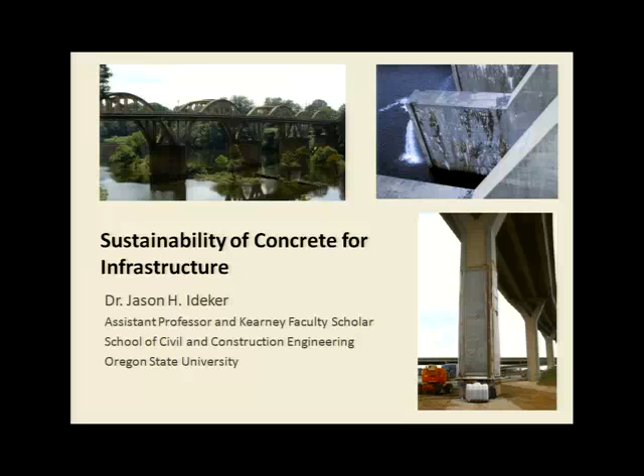I'm going to be talking a lot about concrete. My background is that I'm a concrete materials expert, both early age properties, so any concerns with early age cracking risk and early age volume change, all the way to long-term performance and long-term durability. So you'll see a lot of those themes kind of coming out through the talk today.

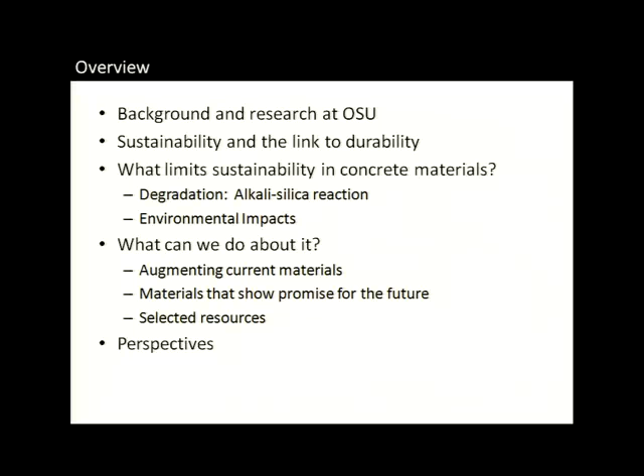Just kind of an overview, I'll give you a little bit of background about the research that we have going on at Oregon State, tell you a little bit about the classes that I teach. Some of you may be interested in some of those, and we can talk about ways that we can maybe make some of that happen. We'll also talk specifically about sustainability and what the link to durability is when we're talking about concrete for transportation infrastructure. And we'll talk a lot about some of the main degradation mechanisms that can limit concrete durability and concrete sustainability, all in the context of transportation infrastructure. Probably most importantly, we'll talk about what we can do about it. And I'll wrap up with some perspectives at the end.

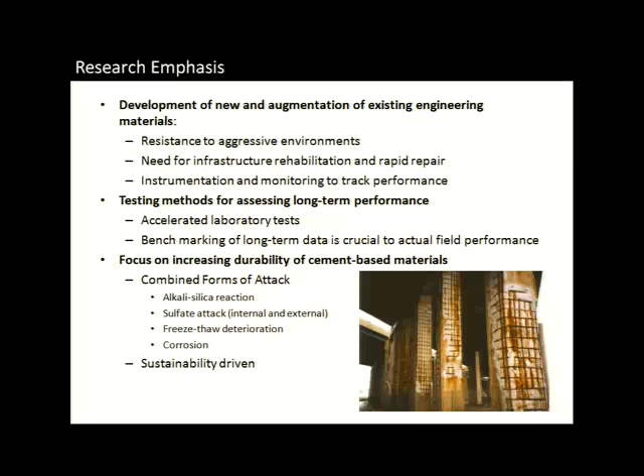So I'm not going to give you a whole lot of details here, but basically the research emphasis that we have for our research group at Oregon State is developing and augmenting new and existing materials for engineering applications. We have a pretty big focus on test methods so that we make sure that the accelerated laboratory tests that we do really capture the field performance of structures in the long term. And that ties in a lot with the focus on long-term durability of cement-based materials. One of the main reactions and main areas that we study is alkali-silica reaction, so I'll be talking a good bit about that today because it really affects a lot of our transportation infrastructure and civil engineering infrastructure in general.

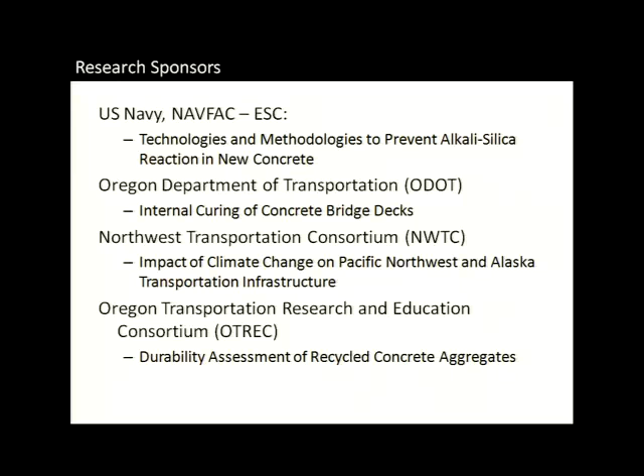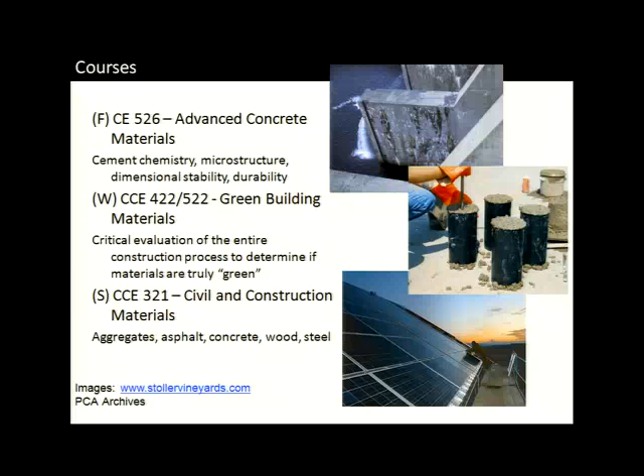I teach 3 courses at Oregon State. I put them in order now. So fall term, I teach an advanced concrete materials class to graduate students, but it's also open to upper level undergraduate students. The main two things we focus on there are development of concrete microstructure and durability, and really making the link between microstructural development and what the long-term performance of the concrete is. I also teach a fairly new class - I've taught it once. A student in here, Christy, already had that class when she was an undergraduate at Oregon State, but it's focusing on green building materials, taught at the undergrad and graduate level. And then in the spring, I teach our junior level civil and construction engineering materials class. About 90 students in that class, and it's a lab section course also. So we cover everything from aggregates to asphalt, concrete, wood, and steel.

So when we start to talk about sustainability and the link to durability, somewhat I think the two terms are a little bit interchangeable, but we can't really be building and developing sustainable structures if we're not taking into effect what the long-term performance is going to be and what the ultimate durability is going to be. A lot of that really comes down to ensuring long-term performance of the concrete. Doing life cycle analysis is something that's very important, and taking a systems approach. A lot of times it's not just one particular mechanism that can limit the long-term performance of our transportation infrastructure, but it's a lot of different factors coming together to potentially limit what the long-term performance is going to be.

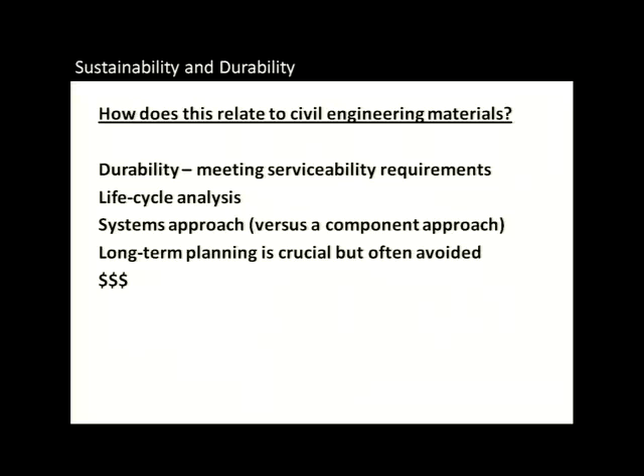Our overall infrastructure grade stayed at a D. I think the interesting part here is that it's estimated a $2.2 trillion investment over a 5-year period would be needed to bring the infrastructure up to a level that's just satisfactory, just to a level that meets the demands we currently have.

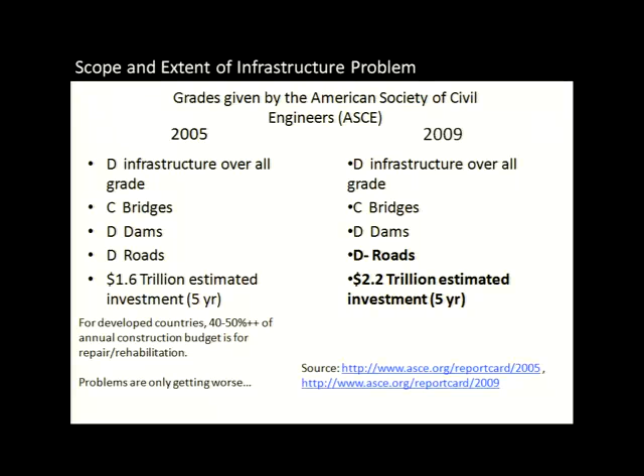Another important thing to highlight is that a lot of times we think about new construction, but for most developed countries, about 40 to 50% of their construction budget deals with repair and rehabilitation. Our new construction has to be durable and long-lasting, but one of the biggest things is that for existing structures in need of repair, you don't want to come back and repair the repair. Yet we tend to do this time and time again.

So the repair materials we're using, and it's not just the materials, but the way in which we conduct the repairs and how we actually treat the materials when they get placed into service, can really limit how effective those repairs are. So any new materials and any repair strategies we use really have to exceed the performance of the current materials they're replacing.

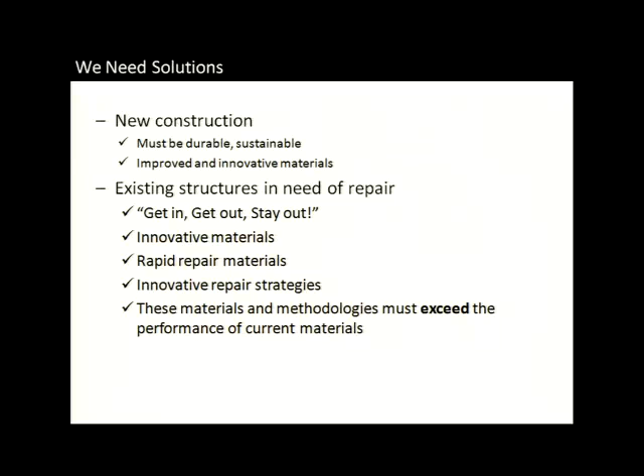Okay, so let's talk a little bit about cement and concrete. Concrete is the most widely used building material in the entire world. The only thing consumed in greater quantity on the planet is water. This is pretty significant if you try to wrap your head around that.

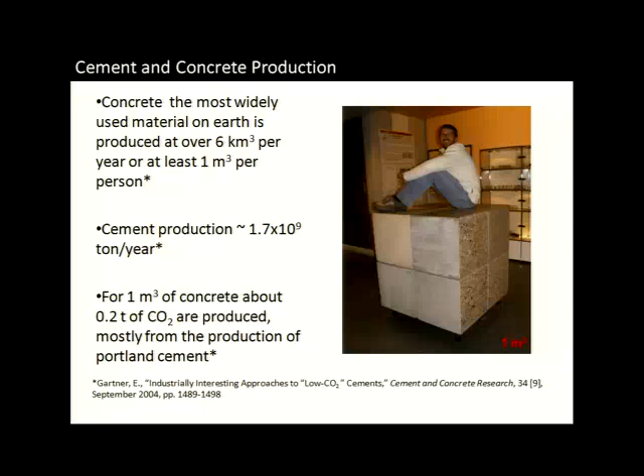At the very bottom, it shows that for about 1 cubic meter of concrete, about 0.2 tons of carbon dioxide is produced. So what that boils down to is that the cement and concrete industry is responsible for about 5 to 7% of the world's output of carbon dioxide.

That's one of the reasons you see so much emphasis placed on reducing the carbon footprint of concrete. What's important about this number is that it doesn't really tell the whole picture. That 5 to 7% is a worldwide average. In the US, Canada, and Europe, we're responsible for about 1.2 to 1.5% of CO2 output.

That's because we use very efficient kiln technologies. We recycle a lot of the hot gases coming out of the end of the cement kiln to preheat materials. So we reclaim a lot of that CO2 and put it right back into the materials, so it stays in process a lot longer compared to very inefficient kiln technologies used in some developing countries.

Those places may be responsible for 10, 15, and even 20% of the CO2 output. So certainly one of the biggest things we can do to reduce the carbon footprint of concrete is to improve the kiln technologies and manufacturing technologies used throughout the world.

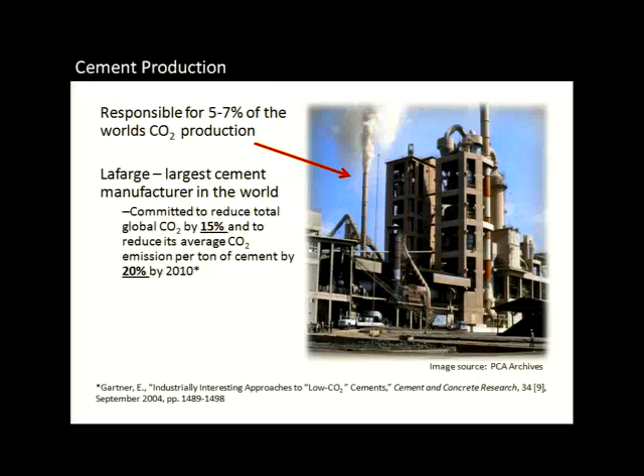Just as a point of reference, if you look at where other major contributors to CO2 are, for commercial buildings in the US, we're responsible for about 30 to 40% of the CO2 output from buildings. So certainly the concrete industry has a kind of black mark for its contribution to CO2, but there are other industries that also produce a lot of CO2. We're going to talk specifically throughout the rest of this talk about how we can really reduce that CO2 footprint from concrete.

Okay, so it's not all gloom and doom. There actually is some good news about concrete. Concrete does have a very low embodied energy compared to other building materials that could be used in its place. I'll show you a figure on the next slide to give you an idea about that very low embodied energy.

We can also use concrete very effectively to make highly efficient structures. The thermal mass of concrete can be used to moderate temperature fluctuations. It can be used for active cooling and active heating as well. Also, the light colors that typically comprise concrete help to reflect heat and light, so they can help reduce the urban heat island effect that we have in large cities.

The other thing that's kind of great about concrete is that it's a very forgiving material. It can take on a lot of recycled materials. We can include a lot of recycled materials, byproducts from other industries, that actually improve the concrete properties. So they don't actually make it worse. In most cases, they actually make it better.

I'm going to put a side note too that high-strength concrete, and the use of high-strength concrete, can actually reduce the amount of concrete that we need in structures. So if we can produce a higher strength concrete, also a higher durability concrete, we can increase the lifespan and the intended use of that, and we can also reduce the amount that's required. The other great thing is that concrete itself can be recycled into new construction materials, whether that's new concrete, asphalt, backfill, insulation, or put into raw feed even for producing new cement.

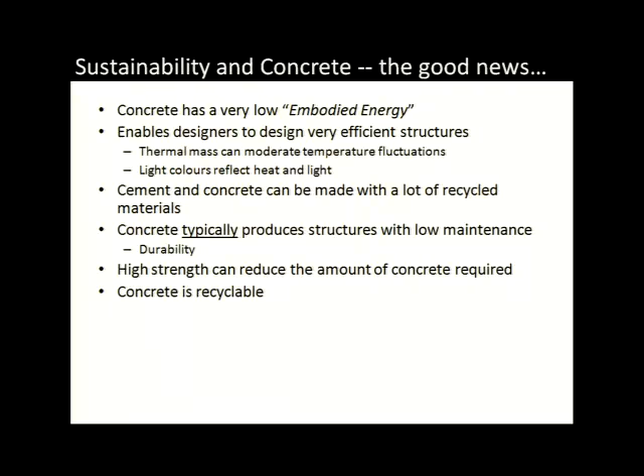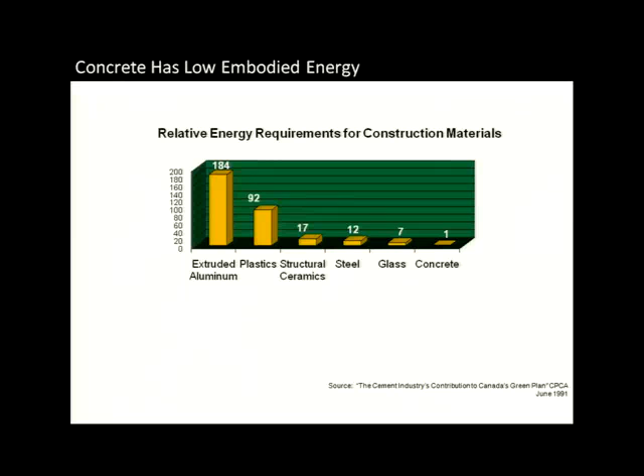Where would wood fall on this? That's a good question. It definitely depends, but wood is going to fall somewhere in between glass and concrete, and depending on where the wood is produced and how far it has to be transported, can be even less than concrete. The reason I didn't put wood on here is that wood is not a typical building material that we use for civil infrastructure type applications. But there's certainly a whole other arena of the market where wood is a much better option than a lot of these other materials. Certainly the residential housing market is one of the places that we mainly use wood also. That's a great question.

But I've hit kind of the four main areas that can limit concrete's durability. Corrosion is the first one, so corrosion of reinforcing steel. It's the most widely, the widest form of attack that can limit concrete durability, the biggest cause of degradation worldwide. Alkali silica reaction is in there at second, probably a close tie with freeze-thaw attack. And then sulfate attack is the fourth one that can really limit concrete durability.

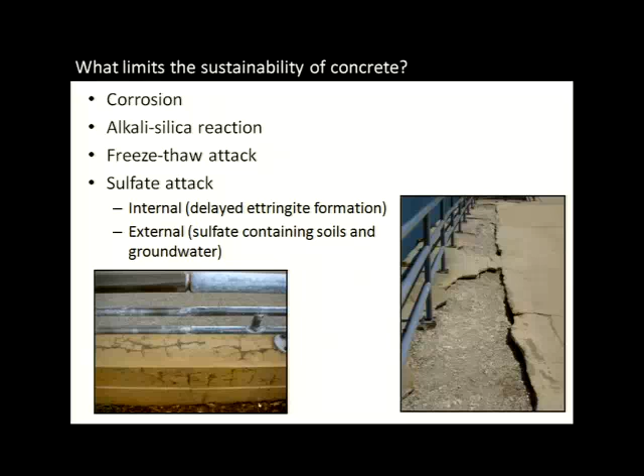I'm not going to get into a lot of details about this, but sulfate attack can either come from internal sources, from when you're actually mixing and placing the concrete initially, or it can come from external sources. So that could be a source of groundwater or a source of soil that has high levels of usually some sort of a sulfate salt in solution.

Not all aggregates have reactive silica, but certain aggregate sources do have reactive silica in them. You also need alkalis - sodium and potassium are the main alkali metals that the Portland cement is supplying to the system.

And then you need moisture. So for concrete in an interior like this, like these concrete columns, the floor that's below us, that's not going to be susceptible to ASR because there just isn't enough moisture available to drive the reaction. We typically need an internal relative humidity above about 80% to drive ASR.

So the main places that we see ASR are in transportation infrastructure and concrete that's exposed to the environment - dams, pavements, bridge columns, bridge decks, those are all typical places where we see ASR.

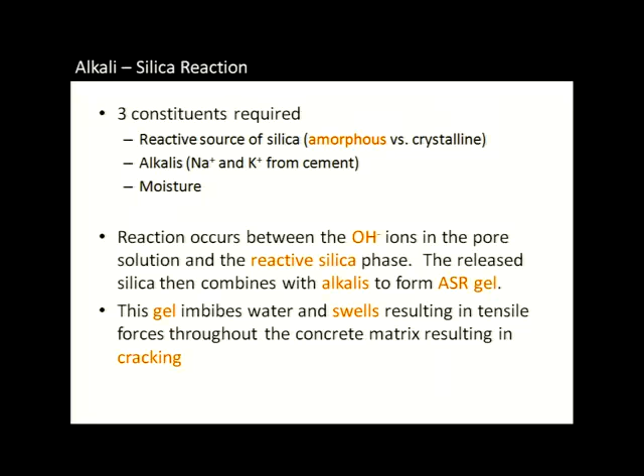So the outward manifestation that you get from alkali-silica reaction is an expansion. You'll see a lot of the slides that I show later on, we're measuring expansion for concrete that we've either cast in the lab or we've taken from the field. And if that expansion is great enough, you get an outward manifestation of cracking on the structure.

This just kind of shows you the idea of what's happening. You've got aggregate inside a cement paste, and this can happen to both fine and coarse aggregate in the Portland cement concrete. As that gel around the aggregate and inside the aggregate expands, it can actually crack the concrete apart. When you crack the concrete apart, you're opening up a fast path for other aggressive agents to come in.

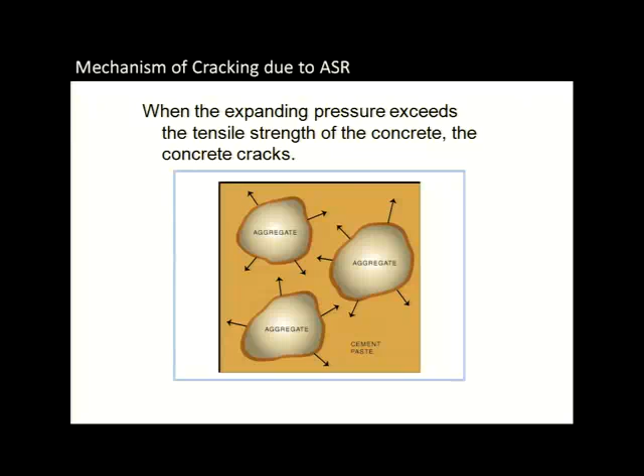An aggressive agent may be water, just water coming in to help drive the expansion in the reaction more. You also set up the propensity for increased corrosion, freeze-thaw attack, and sulfate attack. So certainly we want to do everything we can to limit cracking in concrete.

So what happens if we have ASR actively going on in hardened concrete? There's kind of two approaches that we can use. We can either treat the symptoms or we can treat the causes.

So you kind of see treating the symptoms on the left-hand side deals with filling cracks, trying to limit the amount of moisture that can come into the concrete. We can also provide external restraint, so carbon fiber reinforced polymers to provide the type of restraint around a bridge column that we would need to actually constrain the reaction from occurring, that outward expansion.

We can also do stress relief, where we actually remove parts of the concrete. I know that may seem strange - why would we want to remove part of the concrete? But keep that in mind, we'll talk about a structure where that's been done.

You can also treat the causes, but this is the much more difficult portion of the reaction to control. Certainly drying the concrete out is one of the most effective ways that we can limit ASR. If we can get that internal relative humidity below 80%, we can really reduce the risk of ASR. That can be done through sealants, through cladding, through closing off any internal drain pipes that may have cracks in them, and from really limiting the amount of water that the structure has access to.

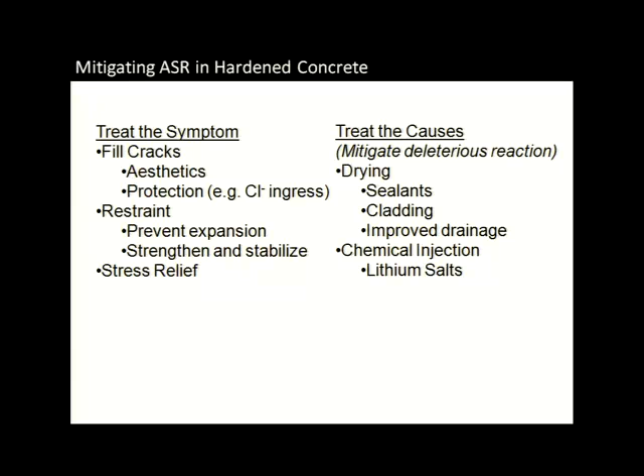We can also use chemicals. We're going to talk a good bit about this over the next few slides. One of the main mitigation techniques for alkali-silica reaction in hardened concrete has been the use of lithium salts - lithium nitrate, lithium chloride, and lithium hydroxide. And we'll talk about whether that's effective or not in the next couple of slides.

Probably one of the most effective ways we have for mitigating ASR is to dry the concrete out. There's a material called a silane, also seen as a siloxane. It's basically a water or alcohol-based material that you paint or spray onto the exterior surface of the concrete, and it acts like a one-way mirror.

It allows moisture to leave the structure but does not allow moisture to come back in. It takes time for the moisture to actually leave, and that depends on your relative humidity on the exterior of the concrete being a driving force to pull the moisture away. But over time, you can effectively dry out a structure with these silane coatings.

As the structure gets larger, it's more difficult to dry out, so you may have to come back several times and reapply the silane coating, and you may have to epoxy inject and fill cracks that open up over time from the reaction occurring. But if you keep a maintenance plan, coming back every few years for 3 to 5 years with this silane coating, you can effectively dry out most concrete structures to prevent ASR.

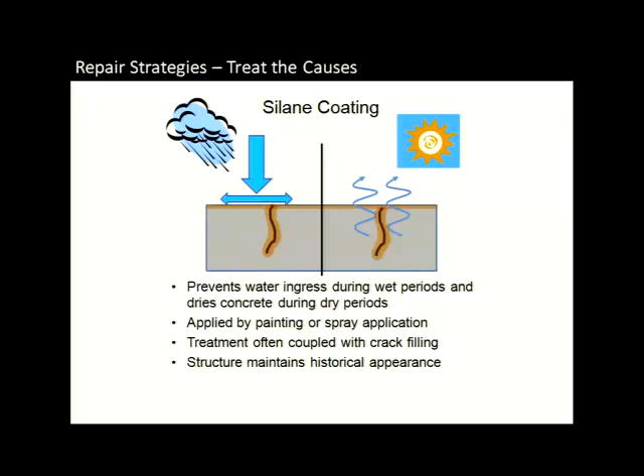So I mentioned the use of lithium salts. This is a project I was involved in while at the University of Texas working on my dissertation. You can see a typical highway Jersey barrier, or concrete divider, with the type of cracking we get from ASR, that map cracking, and workers applying this lithium nitrate solution to the surface of the concrete.

The manufacturer selling this said, a number of years ago, this was a very effective way to control and mitigate ASR. In the laboratory, if you took small specimens and submerged them in the lithium nitrate solution, you could pretty much arrest ASR, because the lithium is very easily able to absorb into a small specimen. It interferes with the structure of the gel and renders it non-expansive, so you end up stopping ASR.

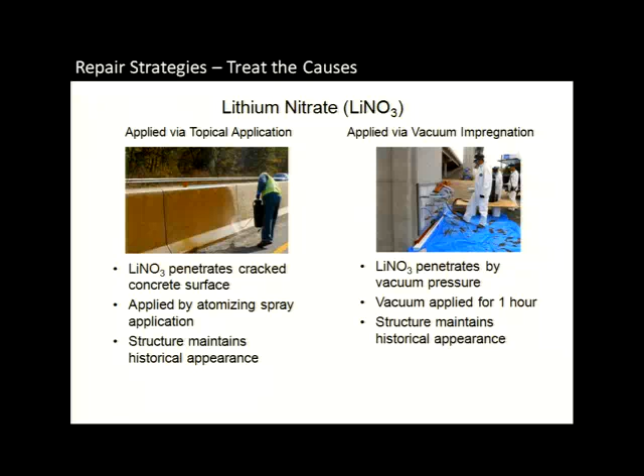We had some concerns, though, about how effective that would be if you can't drive the lithium nitrate deep within the structure where all of the reaction is going on. So we also did some work with vacuum impregnation, where you apply a vacuum pressure to the top surface of the concrete and pull the lithium across, trying to drive it in that way.

I've shown here two graphs, both showing the depth of penetration of lithium nitrate into the structures. These are both from Jersey barriers in Leominster, Massachusetts, about an hour and a half outside of Boston. The red dashed line shows the concentration needed to control the reaction, about 0.01% or 100 parts per million. We took cores on the concrete, brought them back to the lab, profile ground them, and then did acid digestion to see how much lithium is actually there.

In the topical application, you only get lithium down to about 2 millimeters. If you think about 2 millimeters, it's tiny over the width of an entire Jersey barrier that may be anywhere from 150 to 300 or 400 millimeters thick. You really just get down to background levels at depth. As a point of reference, 20 millimeters isn't even a full inch into the structure.

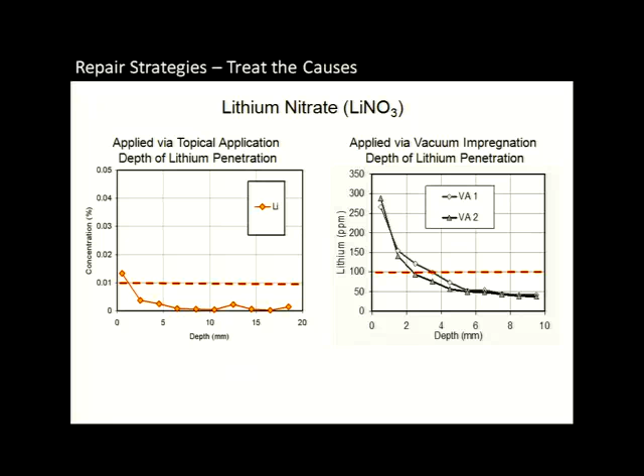If we look at vacuum impregnation, it's certainly a lot better in this case. We're getting it down to about 4 millimeters, but we're still not getting it into any appreciable depth in the concrete. This was a big concern to us, that we're not getting the lithium into the concrete that we really need to control the reaction.

So we moved on to a second structure. This one is for a bridge just outside of Houston, Texas. You can see some really nice tall columns, and this kind of strange apparatus with plastic and wood set up on the outside. I'll get into that in a minute.

A bit of background about this: this structure was constructed from about 1999 till 2002, opened in 2002, and was made with recycled concrete aggregate. At the time, a very sustainable concrete mixture, using concrete taken out of service so it's not landfilled, but put into a new structure. The problem was that the recycled concrete used to construct these was undergoing active ASR.

When it got put into a new structure, it was combined with more cement that's supplying alkalis. It's an outdoor structure, so that drives the reaction even further. They had cracking beginning in these columns within about 3 to 5 years.

One of the things that has come out of this is a research project we now have at Oregon State, looking at characterizing recycled concrete aggregate sources so we can make sure we have the right testing methods in place to avoid this type of reaction from occurring in new concrete. As a side note, Texas has since banned the use of recycled concrete aggregate in new concrete, so you can only use it as a non-structural fill material, or it's landfilled.

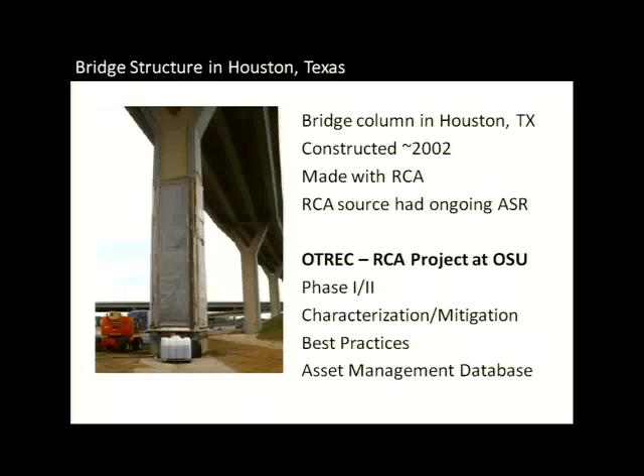So getting back to how we actually tried to mitigate ASR in this structure, we used a technique called electrochemical injection. This is a technique typically used to remove chlorides from concrete bridge decks. What you basically do is set up a temporary anode on the outer surface of the concrete—that's what you see here behind that plastic sheeting. You tie into the rebar by drilling into the concrete. We drilled in, in essence made Swiss cheese out of the column, not to affect it structurally, but about every 2 feet, drilled in 2 feet of depth into the concrete so we could tie into the interior rebar and use that as our cathode.

The idea is that we can basically drive lithium ions into the heart of the concrete, and we can draw out a complementary cation. So we would typically be drawing out calcium ions.

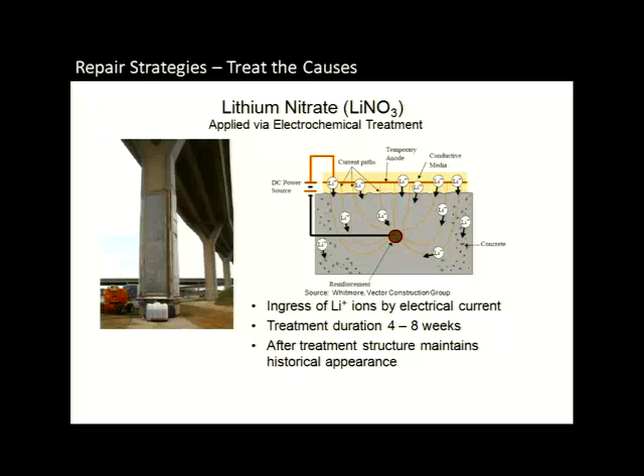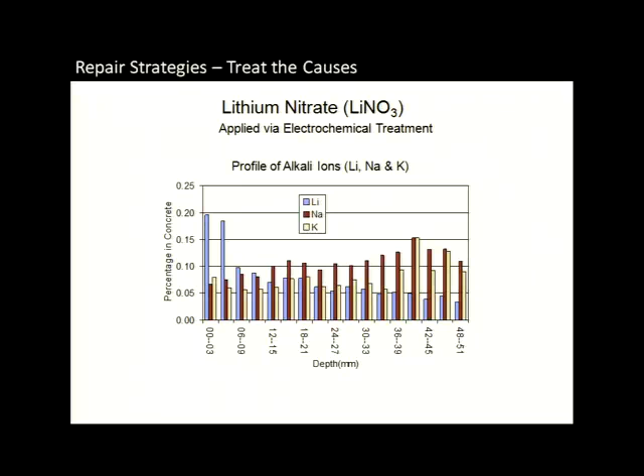Lithium is this lighter purple, the far left bar line. We can get the lithium into the concrete very effectively and above the levels we need to control the reaction. The problem, though, is that we're actually driving in sodium and potassium and concentrating them especially right near the surface of the rebar, about 2 inches in. So we're actually setting up the propensity for a more severe reaction right at the surface of the rebar. This was a very interesting finding—it was good for us to learn this, because basically we don't have a way right now to effectively drive lithium into concrete structures. I think a lot of what came out of this research project is that using a chemical admixture such as lithium nitrate really is not a viable option right now for controlling the reaction. We've still got a lot of things we need to work out.

I just wanted to show a few pictures here. One of the options we could use, in addition to silanes and in addition to trying to dry the structure out, is to provide some sort of external confinement, either in the form of post-tensioning or in the form of carbon fiber reinforced polymers.

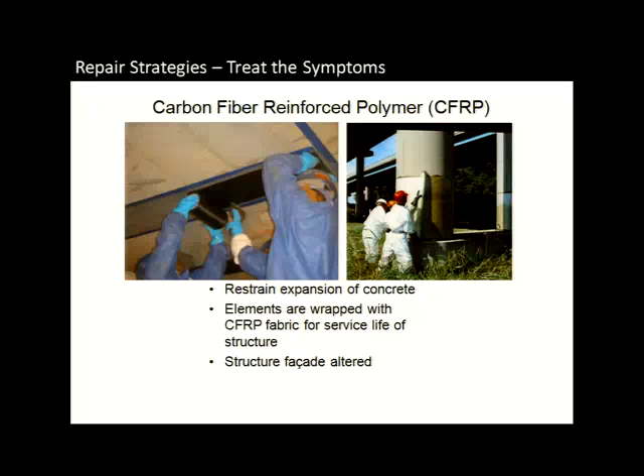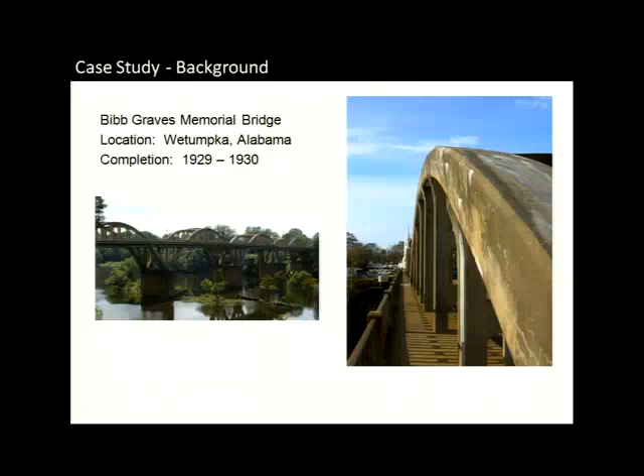We've done a lot of petrographic work, taking cores out of the structure and sending them off to a petrographer who can look at it under a microscope and characterize the aggregates. We've done a lot of work in the lab looking at expansion measurements and cement contents. We can't really figure out yet why this is the only arch that has ASR going on, because the concrete, the exposure conditions, and all the other arches are virtually identical. But we've been monitoring this bridge for about the past 5 years, and it's still showing a significant upward trend in expansion.

One of the ways we actually monitor is that we embed stainless steel pins or stainless steel gauge studs into surfaces of the concrete. They embed typically anywhere from 1 to 3 inches, depending on how thick the concrete element is. They have a very small machined point at the end, and we use a comparator, basically a very fancy ruler, to go in and do hand measurements on the structure. A lot of times for historic structures, they don't want you to actually drill into the concrete and embed strain gauges—they want something a little less invasive that won't affect the historical appearance. So that's one of the things we do in this case.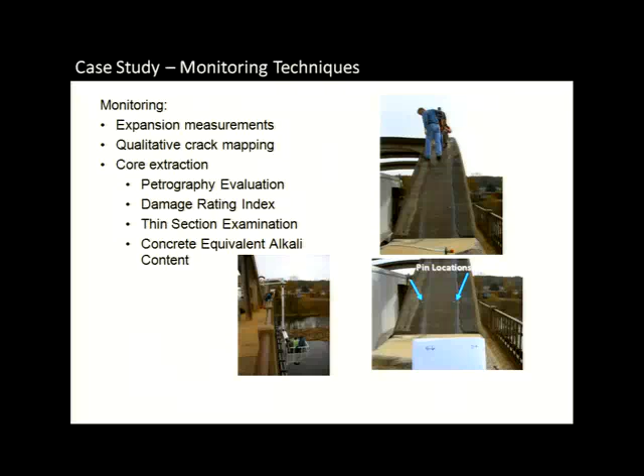And then I mentioned a few of the other techniques that we can use to determine what's going on inside the structure once we take cores out of it. So I'll just show you, here's a picture of one of the cores that came out of this bridge. This is a core from Arch 4. And what we do is we bring it back to the lab.

We put it into a sodium hydroxide solution at elevated temperature to see if there's a case for residual expansion, to see if there's still enough reactive silica and enough alkali in the cement to drive the reaction further. And what we could see from a core from Arch 3 was a fairly moderate level of expansion up to about 0.1%. And then in Arch 4, we see a continued level of expansion all the way out to about 130 days, up to about 0.2% expansion.

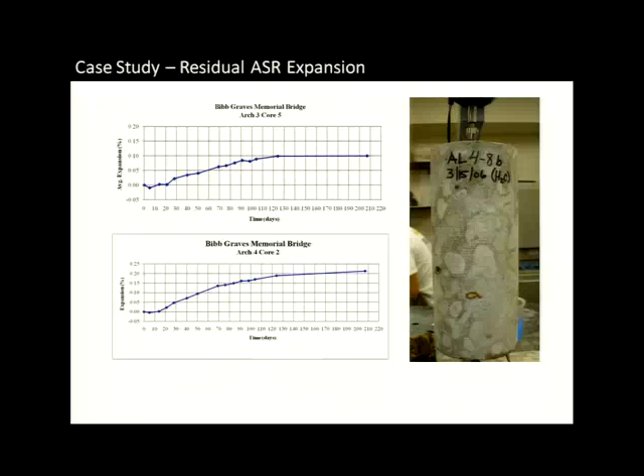So what it's telling us is that the concrete in Arch 4 still has the propensity to expand, and we need to try and do something about it. And there is the potential for expansion in Arch 3 also. So we have monitoring set up so that we can see if that arch is going to start to expand on us as well.

Just a few nice close-up pictures of the bridge. We've been monitoring this continually for the past 5 years. What they're actually going to go in and do in the springtime of next year is do some epoxy injection on the cracks from the top surface of the arches so that they can fill those cracks, bridge them, and try to prevent any additional moisture from coming in.

And then they'll come back with the silane and coat the exterior surfaces of the concrete to try and dry the structure out. Two of my colleagues from the University of Texas actually were just in Alabama this past week, and they instrumented the arches with 48 relative humidity probes inside the concrete so that they can monitor how effective these different mitigation techniques are at really reducing that internal relative humidity.

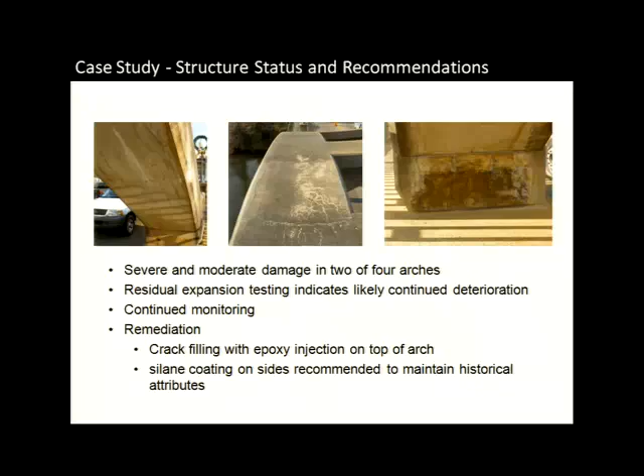So this is just kind of a slide to show you the repair techniques on the left-hand side. And then some impacts on the historical integrity, the structural integrity, the durability, the effectiveness of that repair, and the cost, to just kind of give you an idea of a double green plus meaning excellent, all the way down to a double red minus being very poor.

So certainly CFRP, from a structural integrity and a durability standpoint, is a very viable option, something that could work very well, but it's one of the more expensive options that we have. One of the other things we're not too sure about is the long-term effectiveness of carbon fiber reinforced polymers, so we're starting to look into that as well. So that just kind of gives you a rough hit list of how effective these different repair strategies are.

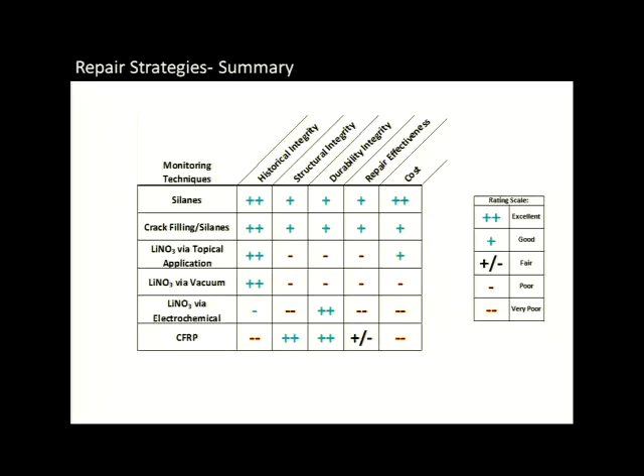Okay, so we've talked about hardened concrete, and some issues from ASR in hardened concrete. But what else can we do, especially for fresh concrete, and what can we do to avoid the reaction in fresh concrete? So I put up kind of a hit list. We've probably seen these for sustainable development: minimizing our resources in concrete production, ensuring long-term durability both through proper design and construction techniques, as well as material selection and materials characterization, and then changes to our manufacturing and construction processes.

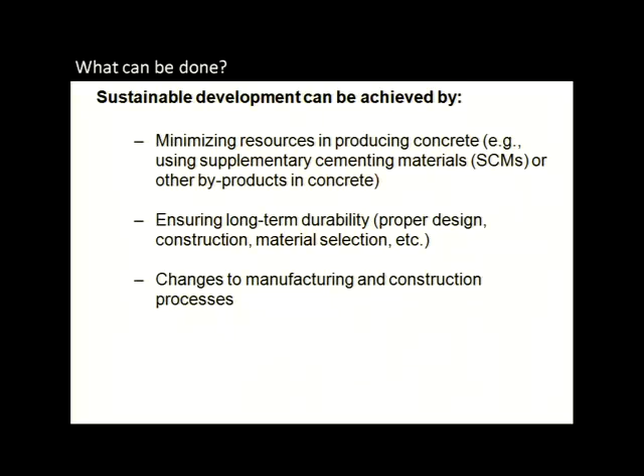So I mentioned that concrete is a very forgiving material. We can put a lot of recycled materials into it, and it can take on a high recycled content. One of the main ways that we can improve the sustainability of concrete right now is increasing the use of supplementary cementing materials - materials like fly ash, ground granulated blast furnace slag, and silica fume. Those are all byproducts of other industries that would otherwise be landfilled, but we can put them into concrete in varying dosages, fly ash and slag being the most forgiving, and we can put probably 30 to 60% of those materials and replace a portion of the Portland cement and actually end up with a better material and a better product because of that.

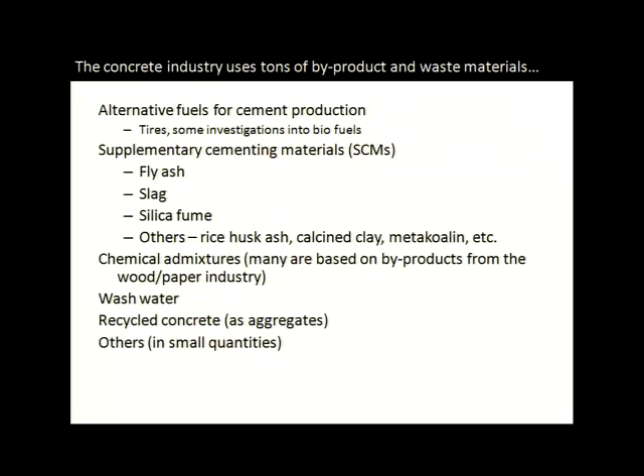So let's look at fly ash as a potential example. Fly ash is a byproduct of the coal-burning power industry.

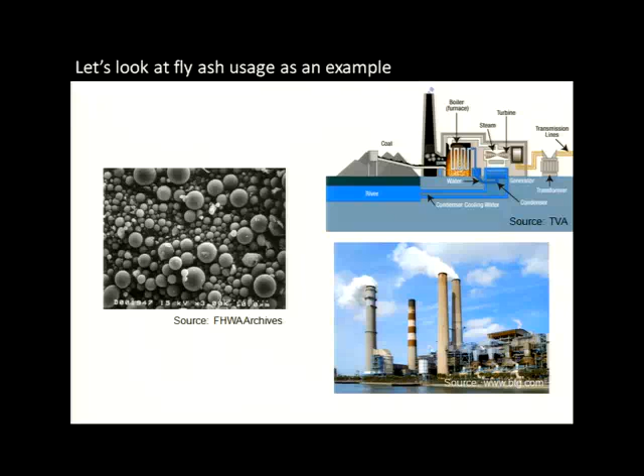Of course, we could debate whether we really need coal burning as our main source of power, but that's a debate for another day. I think at least for the next 20 to 25 years, we're going to have coal-burning power around, and we're going to be producing fly ash. So rather than landfilling it, we should be looking at ways to put it into concrete to make the concrete a better material and to keep the fly ash out of landfills.

I really like this graph. This comes from the American Coal Ash Association, and it shows the beneficial uses of coal combustion products for about a 40-year period, from 1966 up through 2007. What you can see is that the percentage of coal combustion products produced has steadily been increasing over that 40-year period.

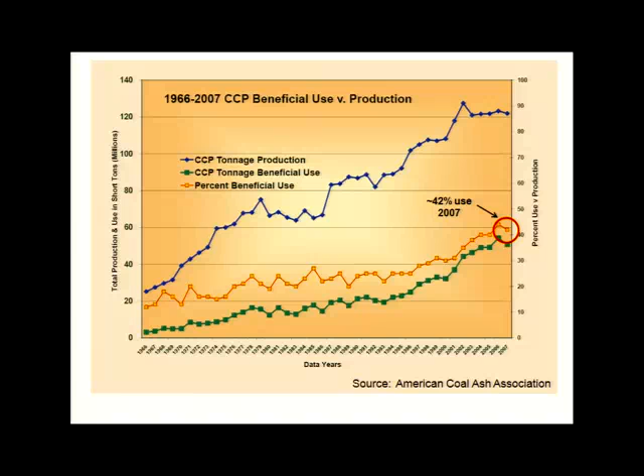What hasn't really caught up is the beneficial use of these materials. In 2007, about 42% was beneficially used in applications ranging from concrete to soil stabilization to gypsum wallboard, a lot of different applications for these coal combustion products. But that tells you about 58% of that material is being landfilled. Even though we're looking at percentages, because the total tonnage production has gone up so significantly, we're landfilling a lot more fly ash and a lot more of these coal combustion products.

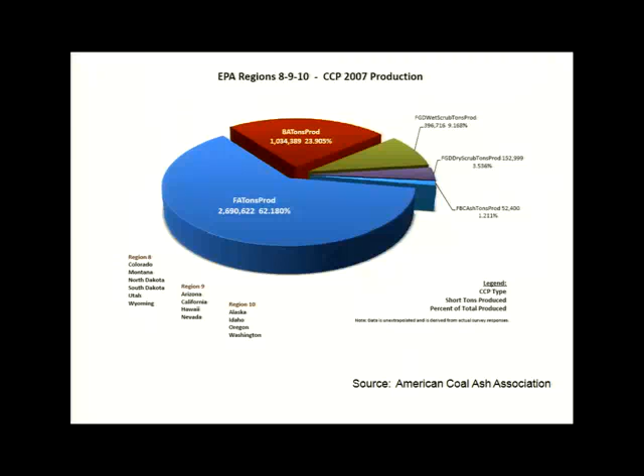Looking a little bit more specifically, this gives you an idea for EPA Region 8, 9, and 10, which does include Oregon. It shows the coal combustion product production in 2007. The large blue wedge is the actual fly ash tonnage produced. And it shows how much of that fly ash for regions 8, 9, and 10 was actually used in beneficial applications. One of the main things we use it for in this region is concrete production, putting that fly ash into concrete to make it a better material.

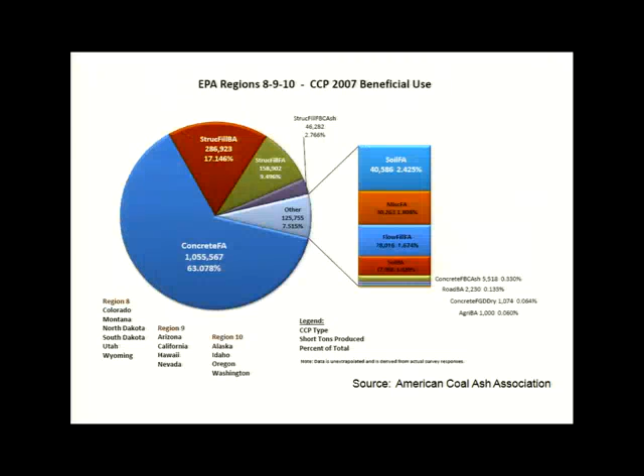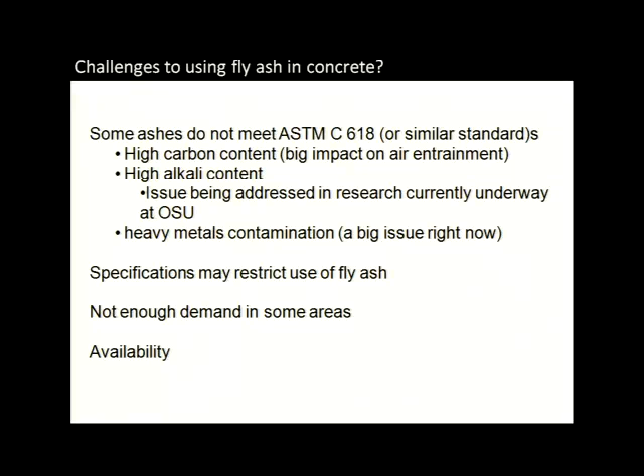There are some challenges to using fly ash. One is the alkali content of the fly ash itself. Even though you may be replacing a portion of the Portland cement, the alkali coming from the fly ash may exacerbate ASR concerns. We have a project with the Navy that's actually looking at better ways we can characterize the fly ash to use it in concrete more effectively. Another thing is that certain specifications, like the ACI Structural Building Code, limit the amount of fly ash you can use, because of finishing issues and concern with salt scaling. But there are certainly a lot of applications where we can use higher volumes of fly ash, and this is something we're trying to change through ACI and ASTM.

So I don't want to bog you down too much in boring details. We'll show you a project that I think is pretty fascinating, where fly ash is actually going to be used very effectively. This is the Mactaquac Generation Station, a hydroelectric power plant in New Brunswick, Canada, on the eastern coast, in the Atlantic provinces of Canada.

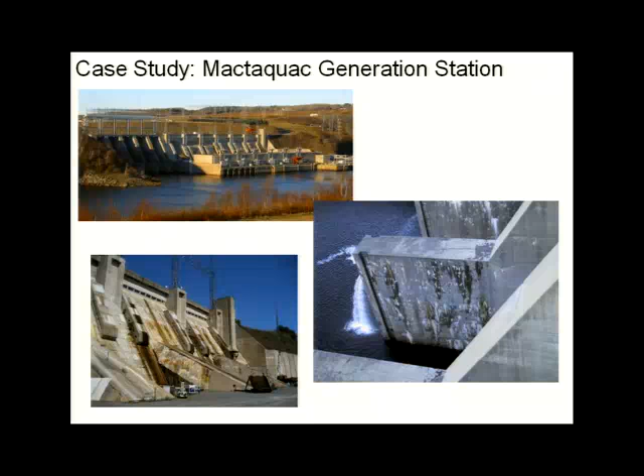This structure was built in the late 1960s. About 1967 was when it was completed. Dams typically have a very long service life, and this dam had a service life of 150 years. What's unfortunate is that the testing methods used at the time to look at the potential reactivity for ASR in the aggregates weren't the best. They were using what they had available at the time, but it wasn't the best approach that we now know.

So what happened was they had all the propensity set up to have ASR going on in this structure. They started to notice cracking and began monitoring about 10 to 15 years after the structure was built. What you see here is that because the structure is embedded in bedrock on either side, the only place it can go from this expansion is up. It's grown by about 175 millimeters since the time it was built, about 7 inches of growth in a structure like this.

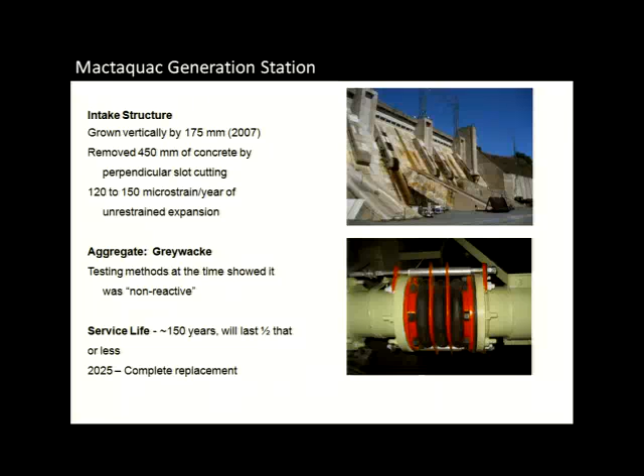So they have flexible couplings in the penstocks, and that's why they have to come in and remove concrete from this structure every single year. About 450 millimeters of concrete has been cut out. What they do is they have a system set up with diamond wire, and they literally cut sections through the concrete, removing it from the front all the way back to the very back end of the dam, from top to bottom, every single year.

It's a pretty massive undertaking for the management of this structure just to keep it in operation. It's the second largest power generating station in Atlantic Canada, so it provides a lot of power to the area.

So I'm going to skip over this and jump ahead.

Yeah, sure. So a question on that. What if they don't remove the material?

If they don't remove the material, basically what happens is the expansion going on would end up crushing the penstocks. It's going to end up causing the turbine blades to be impinged so much that the turbines can't actually spin and generate power. They estimate if they stop doing everything, within about a 1 to 2 year period, the dam would not be functional anymore.

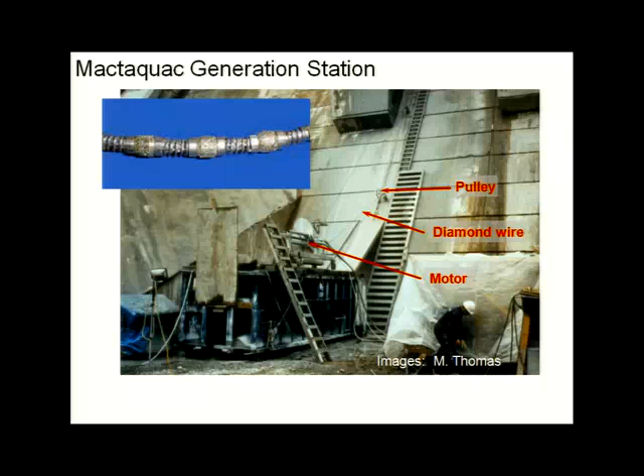And they don't just use it on this dam. There are a number of dams in the world where they use this technique very effectively.

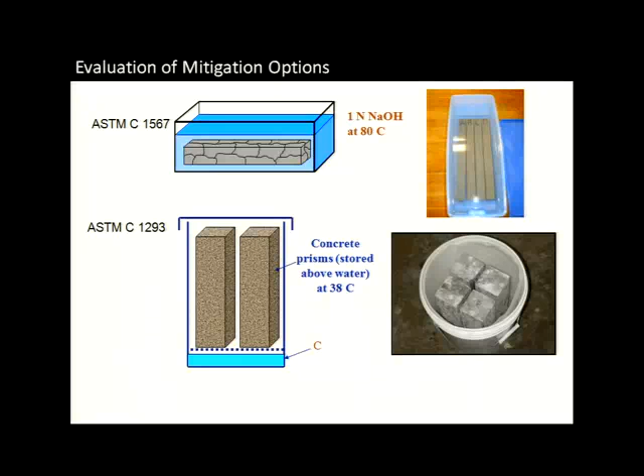And because the dam is such a massive amount of concrete, they have to use the locally available materials that they quarry from the bedrock right there. So we've been involved with a lot of testing, taking laboratory tests, these small-scale laboratory tests, to determine the most effective mitigation options to control ASR occurring from these aggregates in the new dam that they're going to construct, again, in about 15 years from now.

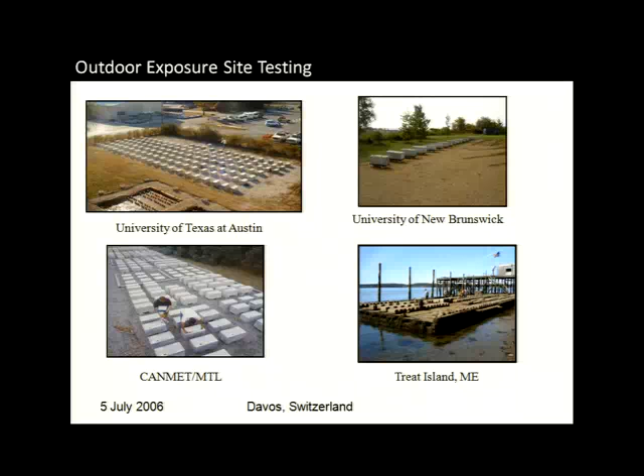So we used outdoor exposure site testing to do this. We had an accelerated kind of environment at the University of Texas, being a very hot and humid environment. There's also an exposure site at the University of New Brunswick, about 20 miles from where this dam is, which gives us a much more realistic exposure condition. We also had blocks of the same size literally inside the dam, inside the Mactaquac generation station, and they've been there for about 10 years now, so we can monitor the effectiveness of different mitigation techniques.

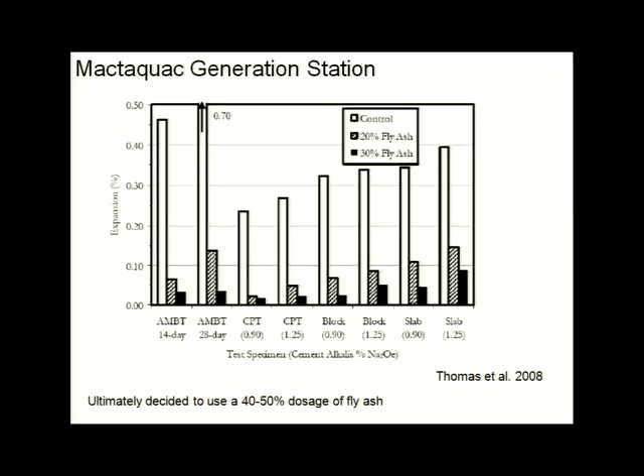But this wasn't really enough for the politics behind this construction of the new dam. They wanted a larger demonstration project to show that they really could take the reactive aggregates and combine them with the mitigation option of a high percentage of fly ash to really control the reaction.

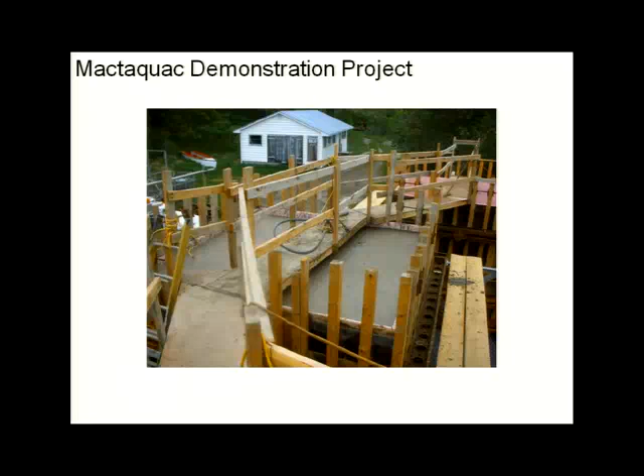There's a control block with no mitigation options at all. Then there's a 30, a 40, and a 50% fly ash replacement in each of 3 additional blocks. There's also a 5th block with a 50% fly ash replacement from a deposit of fly ash that's been specifically reserved for this dam.

They anticipate using the fly ash coming from the coal-burning power plant very close to this dam. But they've had the foresight that if the fly ash is no longer available, or if that coal plant closes down, they've reserved a section of fly ash set aside specifically to have enough to reconstruct this entire dam project in about 15 years.

So it's a pretty extensive study that's gone on to make sure we're not going to have any problems with ASR. We're monitoring this now. The control block has already started to expand and show some signs of cracking. We're going to be monitoring this right up until the point of construction.